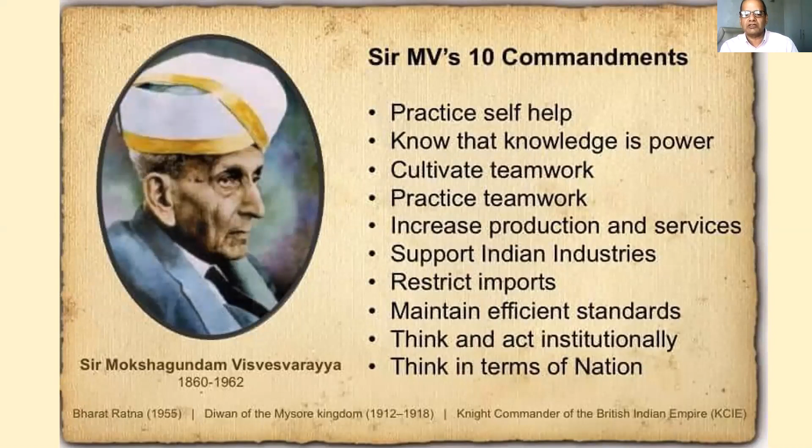So you can circulate that presentation to all the students. About the company, Skeleton Consultants Private Limited, we are three partners, two of them sitting in Indore, Mr. Arun Sodani and Mr. Jay Jain. Many of you might be knowing them. So we three are doing this. We have more than 100 years of experience now, and we do integrated project consultancy where we provide consultancy for the construction of buildings and industries.

Industrial sector is one of the major areas. Second is the building sector, where we do structural design review and structural health assessment of buildings. We do RCC buildings, steel buildings, and many new things too, which I'll show you. We also offer interior design, project management consultancy, and structural diagnostic services, which are very much needed nowadays.

Right from independence and prior to that, we have been building the nation. So it was the nation building phase. Now it is the rebuilding phase, because many of our already built structures are undergoing damage and distress, and they need replacement or retrofitting and strengthening. So we are into the rebuilding phase along with new construction. Rebuilding is a whole science that has to be developed. It is not very methodically practiced in India yet, but we need to do that, and many of you can opt for this. It's not only for civil engineers, but every other discipline is also required. This is the vision of our company, with three people, we strive on these things.

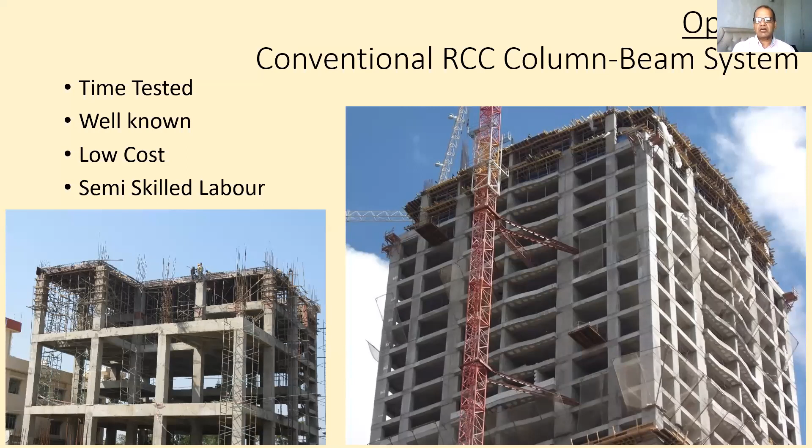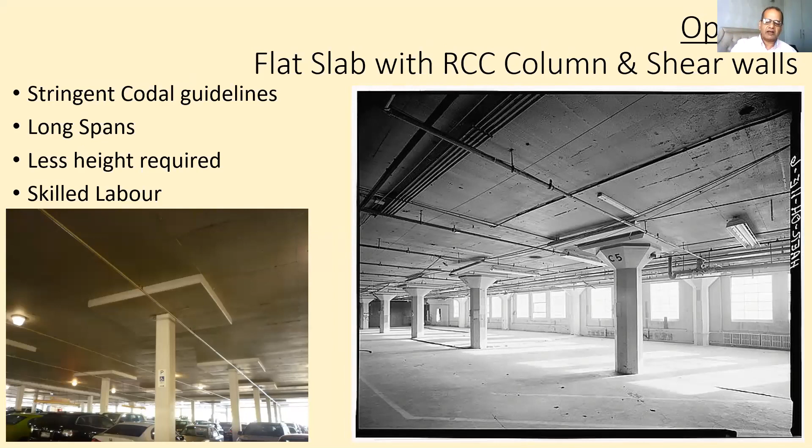Post-tensioning is the third option, where we induce or introduce initial stresses in the members, and these get neutralized when the actual service loads come onto the structure. These are called post-tensioning. Post-tensioning or pre-tensioning, both options are there, but post-tensioning is done for beams and slabs, and you can achieve better structures because in these post-tensioned structures, cracking is also controlled. Concrete has one enemy, which is cracking, because of its brittle nature. Once concrete develops fine cracks, atmospheric agents and factors affect its durability and it starts degrading with time. But in PT or post-tensioned structures, cracks are controlled and their life is certainly longer.

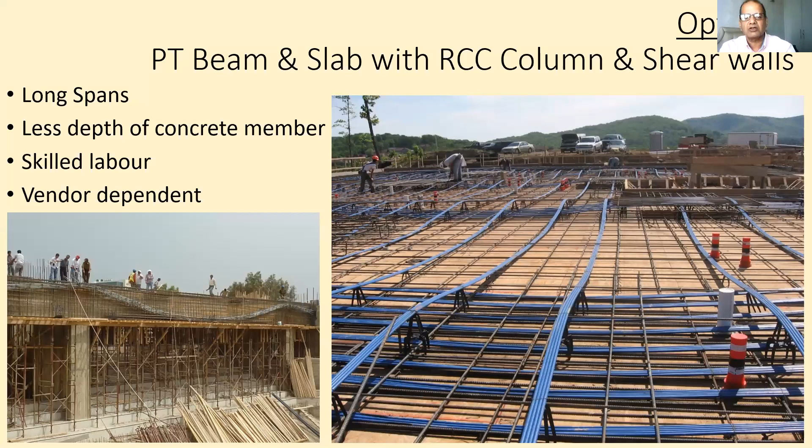But there are more new technologies, with a bit more involvement beyond semi-skilled labor—skilled labor and other things are needed. All these three options I've shown are done on site, or cast in situ, meaning they are done at the site itself.

But there is another type of construction called off-site, meaning you make everything outside, somewhere in a plant or factory, bring it to the construction site, and assemble it, like we do for other mechanical components such as equipment, cars, or pumps—parts are made somewhere and then assembled. The same can be done with construction. This is called precast construction. When done with concrete, it is called precast concrete construction, and we can do this for columns, beams, slabs, and everything.

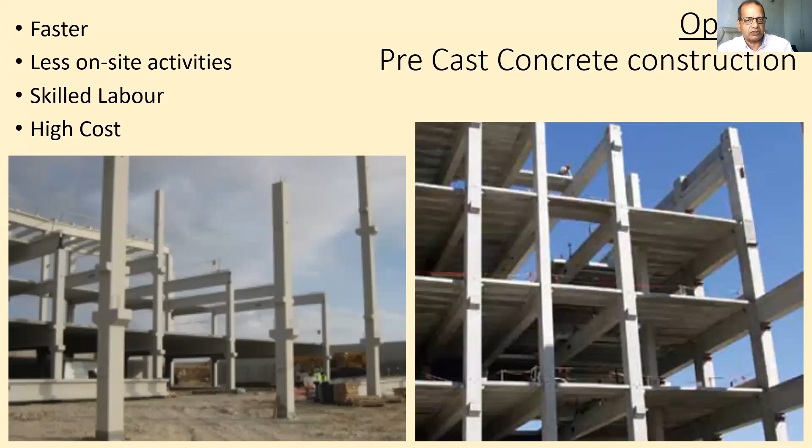This is a bit costlier, but if there are several repetitions or modular construction, these become viable and even cheaper. These are much better quality products because they are produced under the quality control of a factory environment. The site is more clear, neat and clean, with no hassle—you need not stack material or do curing on site. These are big advantages.

But steel is comparatively a costly material than concrete, though it is faster, aesthetically good looking also. You can see these very good structures, many beautiful structures around you. All of you must have seen steel structures.

Sometimes when I ask in class, if this would have been a physical lecture, I would have asked all of you, have you seen a steel structure? Many of you are unaware that there is a steel structure around you and you start looking left and right. But you all have seen very good steel structures. The railway is one of the biggest steel structure makers in this country, so all the railway platforms and other structures are in steel. You have the factory sheds, you have the buildings also nowadays.

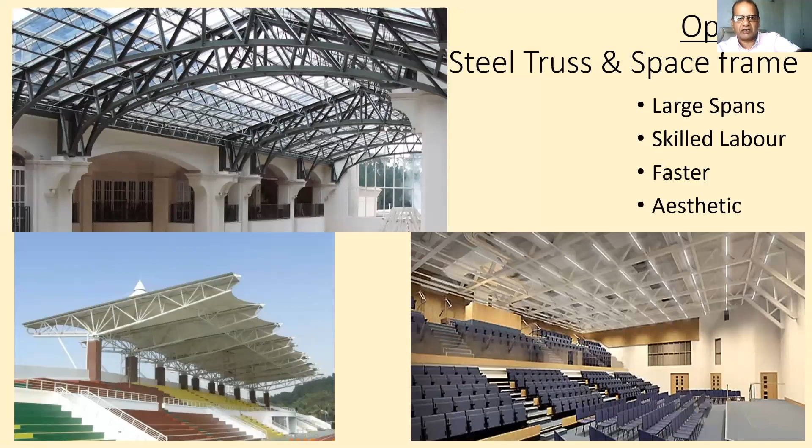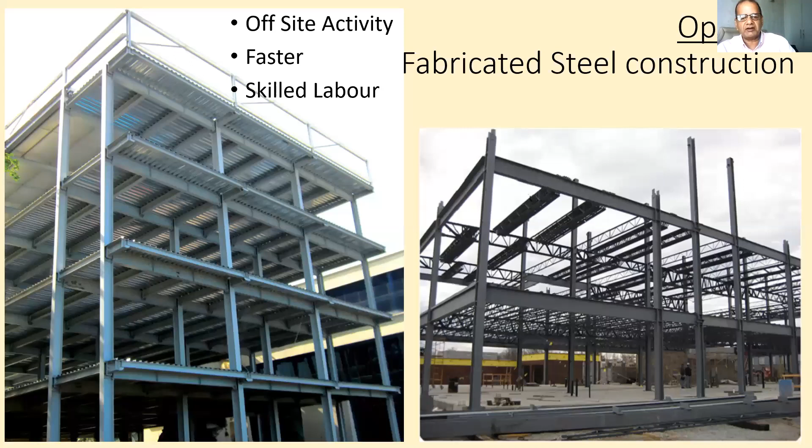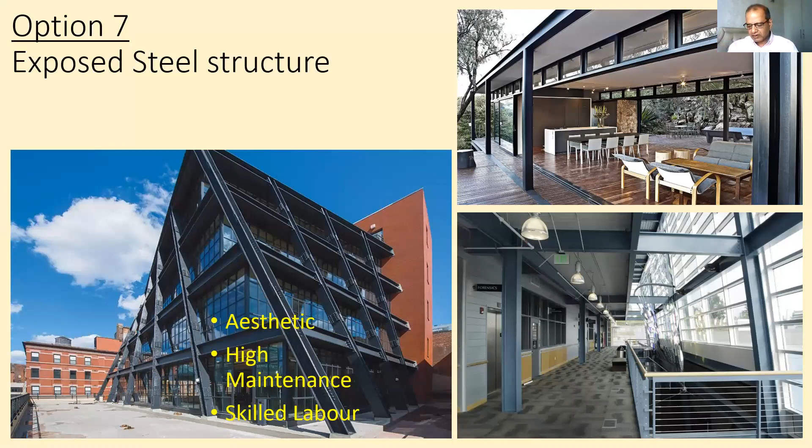Option 8 is bamboo. You will really be surprised that bamboo is being presented as a construction material. Yes, we are growing a lot of good varieties of bamboo, and there is an IS code also for using bamboo as a structural material, IS 15912, and using that several big structures have been made in the country. Recently we completed India's largest bamboo structure in Chandrapur near Nagpur in Maharashtra - it is a Bamboo Research and Training Center where a 1 lakh square foot building has been made with bamboo only.

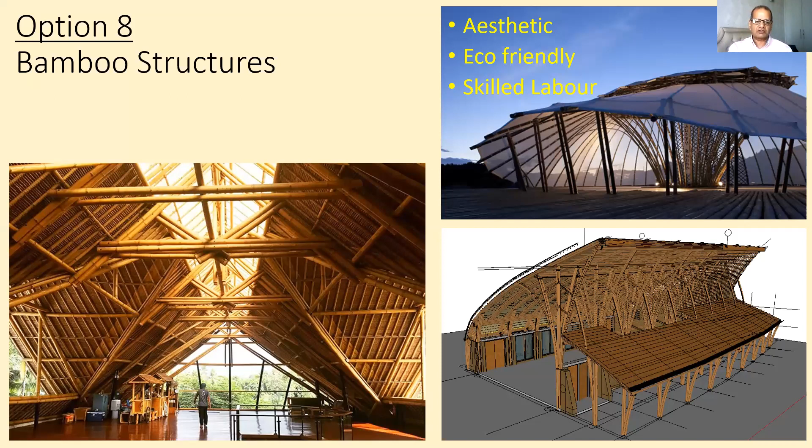There is no concrete or steel above the ground, it is all bamboo only - column, beam, structure, cover, roof, everything is bamboo. And it's beautiful. The advantage is it's sustainable and eco-friendly, but you need skilled labor because it is a new type of material, it is under the developing stage. So every joint has to be very methodically analyzed. Slowly we are developing all those joints, construction methodology, and everything for this. This is also a very good material.

These are various options using the material. Aluminum is also there, but with aluminum we are not making regular construction. Some of the projects I'll show you, which we have done, are very different projects - they are not routine buildings. They are different, just to give you people an idea of what all is available for you, for your study, for your thoughts, for your professional career and all that.

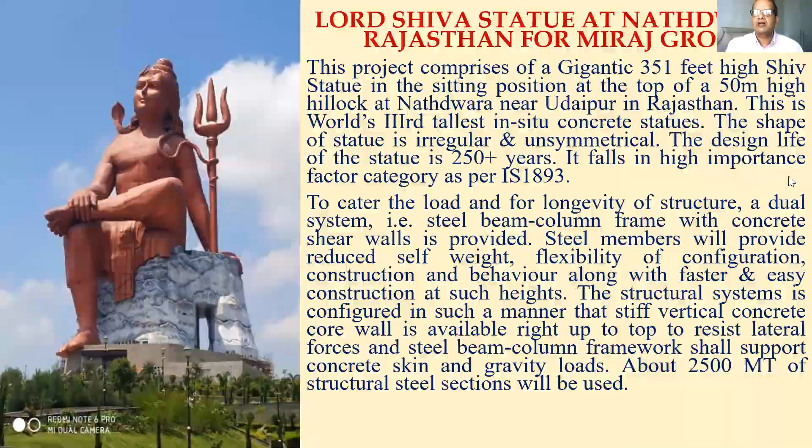This statue, I don't know, many of you must have seen - this is world's tallest Lord Shiva statue and world's fourth tallest statue. This is 351 feet tall and made in Nathdwara near Udaipur. This statue is cast in situ concrete - whatever you see, all the curves, all the shapes, everything. All these things on the head of Lord Shiva, the tilak that is made, everything, the jatayein, their hair, everything.

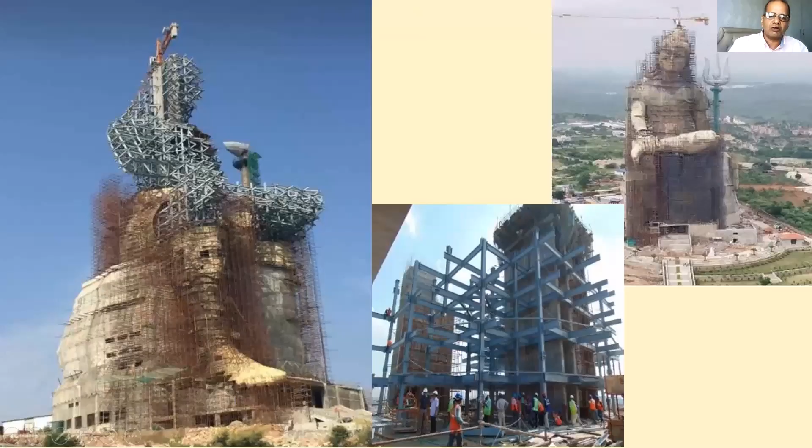This is all cast in situ concrete. Nothing has been done separately by putting some artificial material - no, this is all concrete. Even this snake hood you see is concrete, built there on cast in situ. But this all has been done on a steel frame structure. You can see on the left side image, the steel skeleton has been constructed first - the marvelous structure made with steel and concrete, 351 feet, and it is almost ready.

You all should visit Nathdwara, not from the religious point of view, but from the civil engineering and monumental construction point of view, to see this. This was designed by us.

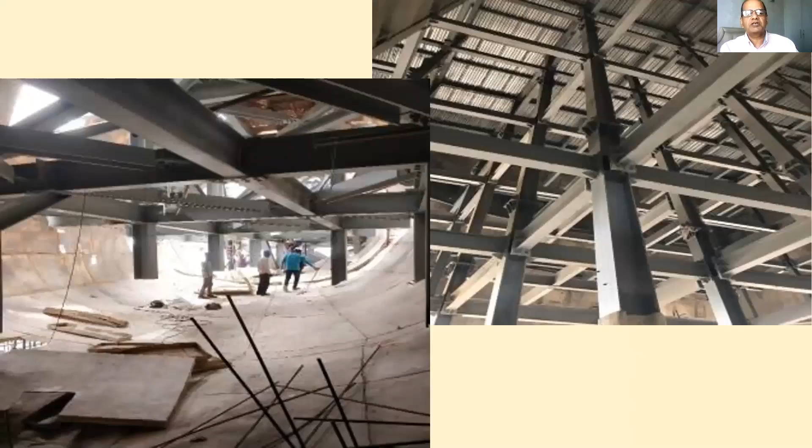The entire engineering has been done by skeleton for a life of 250 plus years. More details we can see—these are internal details of this stage. This is a residential project in Jammu, a 15-story building, a complex of 7 lakh square foot, India's largest residential complex.

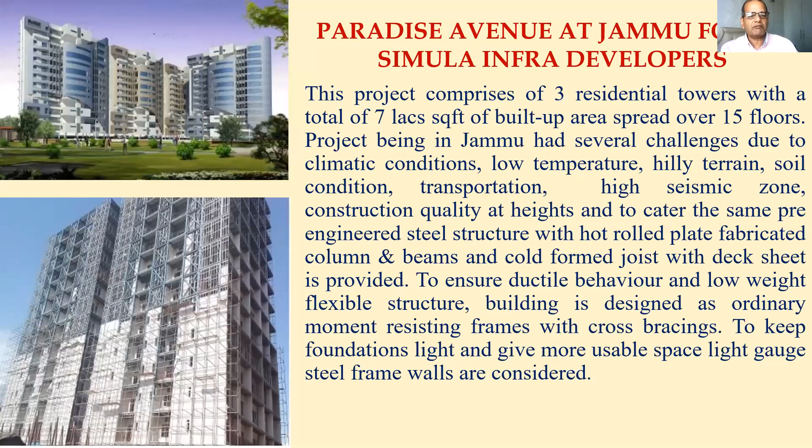It is all steel above ground. There is no concrete, brick or anything. The structural frame is steel. Walls are made of lightweight drywall. This is a finished building where the walls you see are not brick walls—these walls are boards, drywalls with insulation inside.

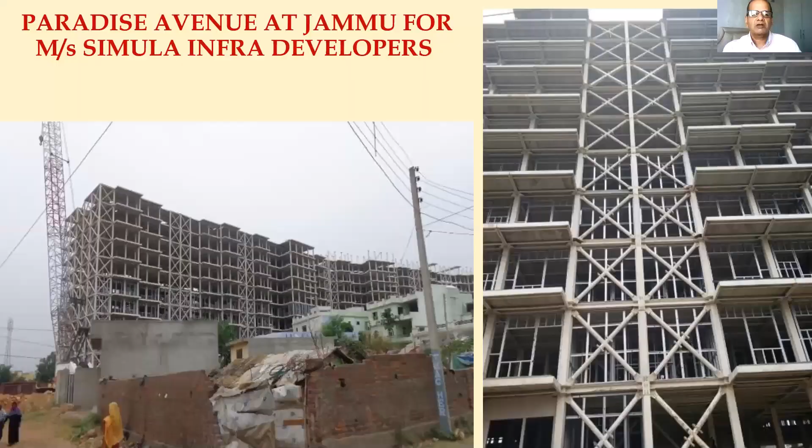For many years, we have been thinking bricks is the only available option for the wall. But later on, we understood that the purpose of wall is not to have a heavy component in the building, because dead weight of the wall is too much—brick wall is too much. So these are now being slowly replaced by the lightweight drywall and other options. These are some of the pictures of that building.

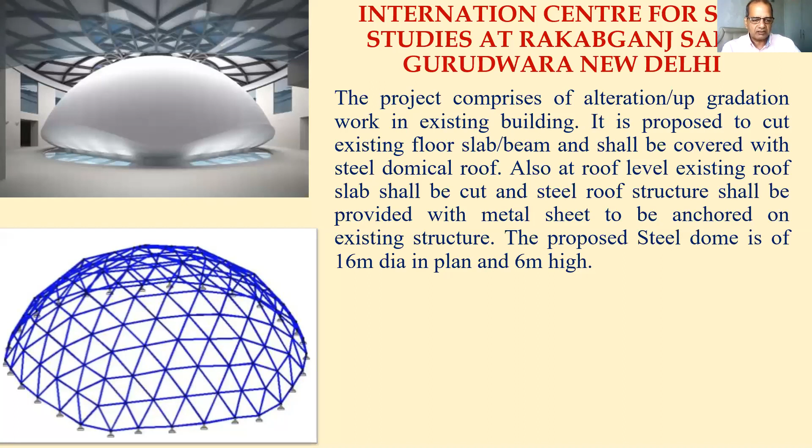This is the construction. The construction of this is complete, and we did this in a very challenging situation. It is housed inside an existing building where already an RCC slab was there on top, supported over 4 huge columns. We removed that slab, we removed those RCC columns, and we covered that with another dome—so there is a dome on the roof level and another dome inside. Both these domes are steel structure. So steel has enormous possibility of construction.

It's a mall in Dubai, again all steel. I'll not give you more details of this because in that part of the world, steel and precast construction is much more popular.

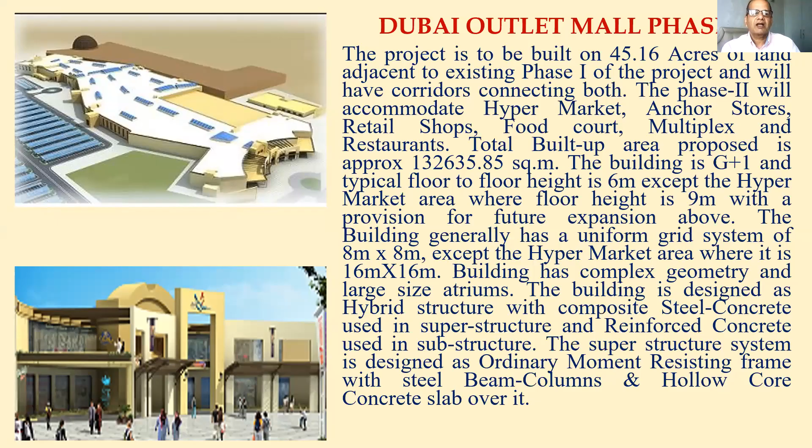These are lightweight structures used for extension in existing buildings. With increasing FAR, floor area ratios, increasing population densities, and increasing cost of land, vertical expansions have become very popular. But the existing old buildings are not designed for those many floors and those loads. So light gauge steel framed construction—very light gauge, thin—is used.

This kind of, if I see, you can see these structural frames. These are very light, 1 mm thick sections. These are called light gauge framed sections, utilized to create structural walls and roof, and then extension with lightweight material can be done—much lesser weight than conventional brick and concrete.

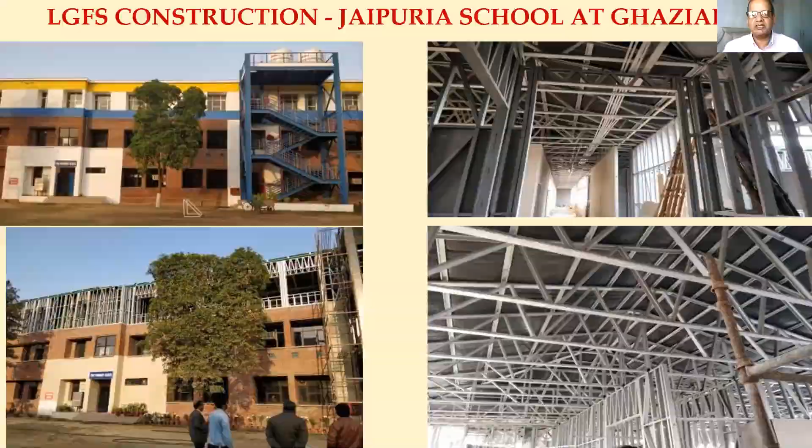This is a building in Indore. Many of you must have seen it on the bypass. This is a hotel, Golden Leaf Hotel, Golden Leaf Banquet. Once you see the finished part of this from the outside, you can't tell that it is steel. But these pictures show that it was a steel structure made first and then finished. So steel is very good for such kind of construction also.

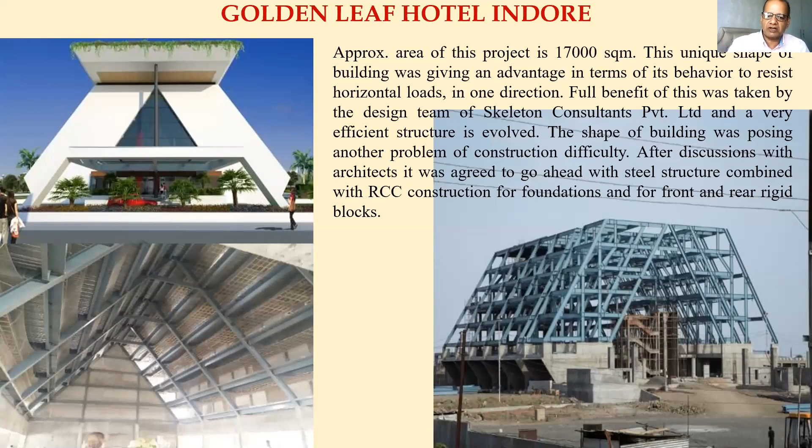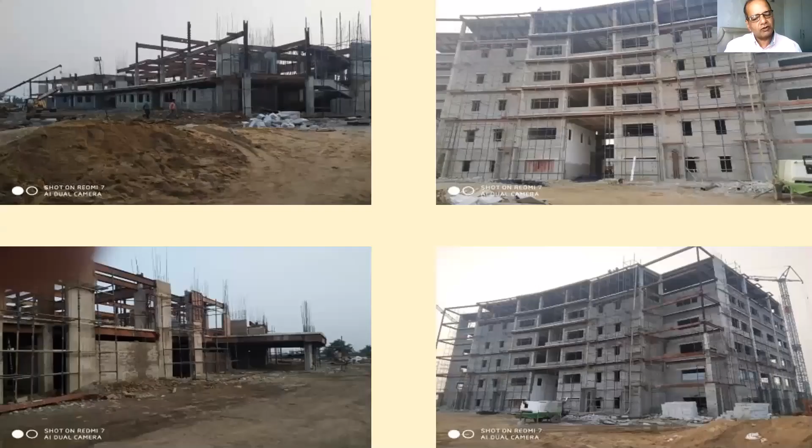By itself, steel alone has some disadvantages like fire rating, fire resistance, and corrosion. So nowadays it is being used as a composite material also, meaning the steel sections are covered with concrete, and composite behavior is achieved where the goodness of concrete and goodness of steel are combined together, and we get a very efficient structure. The IIIT Nagpur campus, under construction, has been designed by us on the composite theory. These are pictures where the steel structure is being erected and then encased into concrete.

Some schools we have done in Noida are steel buildings, completely steel structures, ground plus 5 and 6, built very fast—in about 6 to 7 months these kind of buildings are finished. This is the structure of that school.

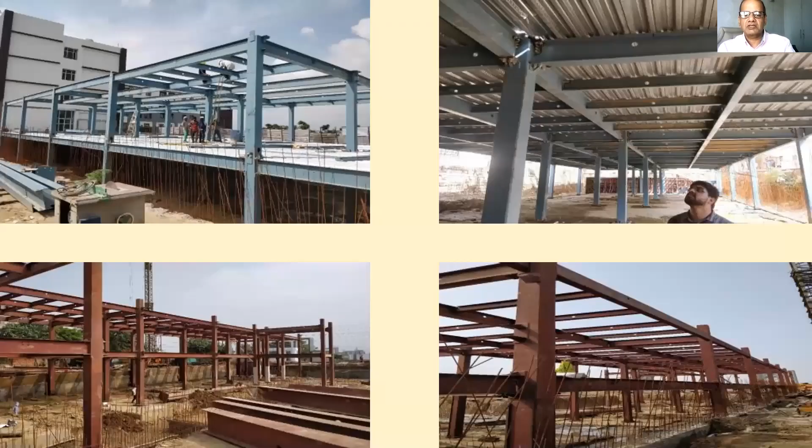For residential building, superstructure is required for the gravity and lateral load resisting frame system, horizontal diaphragm system, and wall system. There are basically three components of a superstructure in the building: one is the frame, one is the slab, one is the wall.

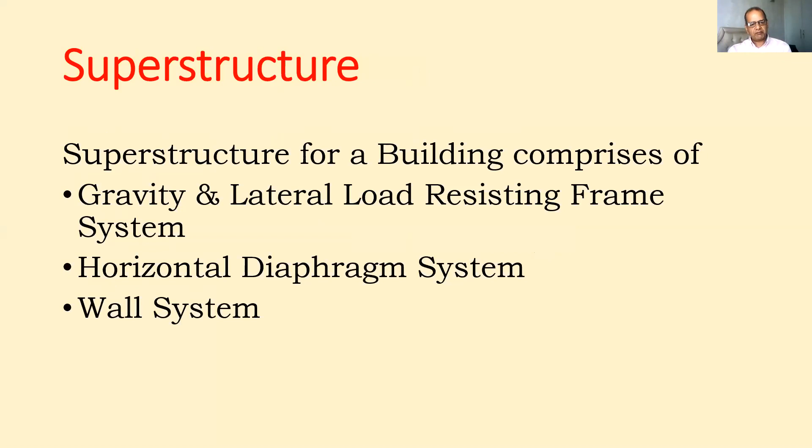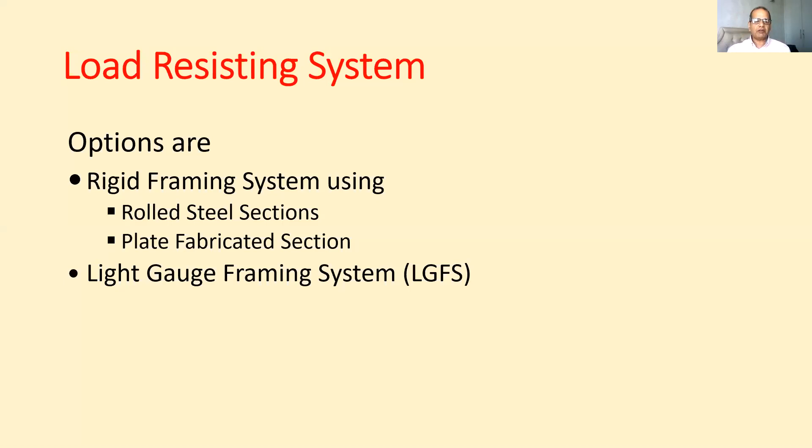There are options for the lateral load resisting system. For the frame, you can have rolled steel sections which are ready available sections, which we call I-beams or channels, and plate fabricated sections—you can make the same section using plates, which are cut and then welded to form the shape. The second option is the light gauge framing system, which I have shown. These are some of the rolled steel sections.

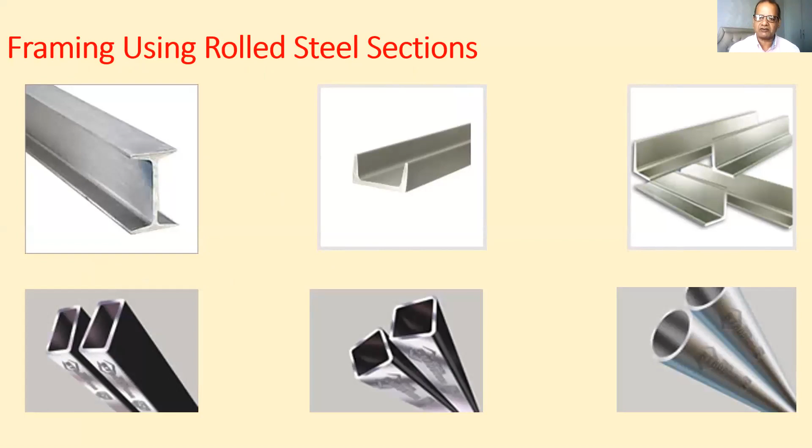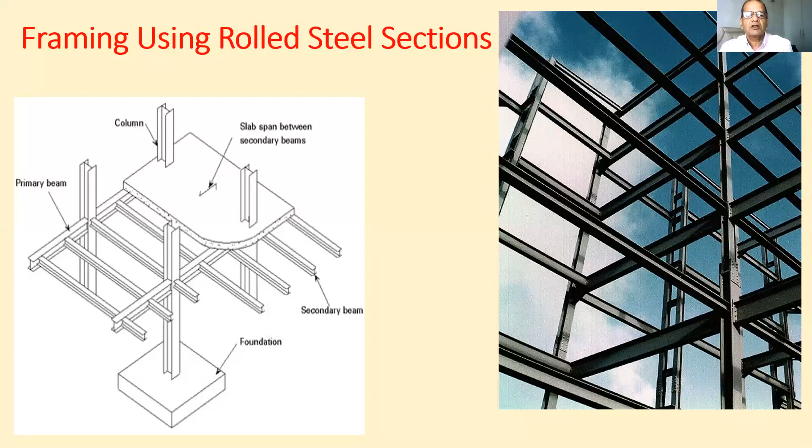Yes, sir, it's visible. These are rolled steel sections which are readily available off the shelf from the factories. We can use them, or we can make plate fabricated sections also. Using the rolled steel section, we can make building frames of this kind, where rolled steel sections are cut to size and then connected to make buildings.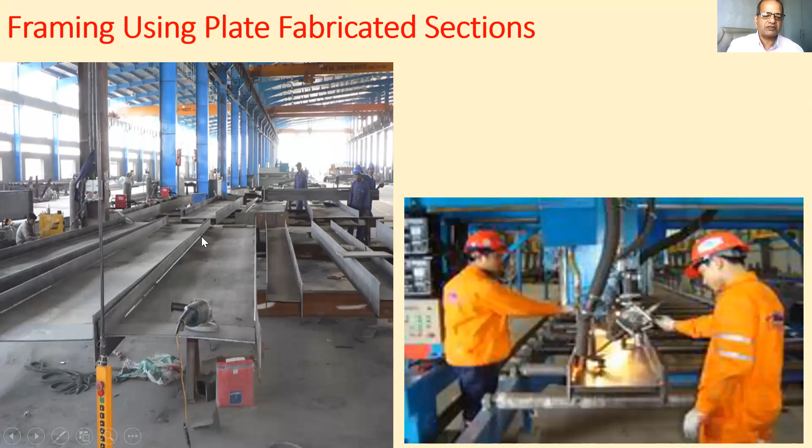Plate fabricated section means, if you see on the left side image, there are three plates - one middle plate and two plates on the sides, giving them an H or I section shape. These are I-beams or H-beams. Depending on the design, we can customize the size of these members. This is a welding machine - automated welding machines in factories where such sections can be efficiently and with good quality manufactured, fabricated, and then these kind of buildings can be made.

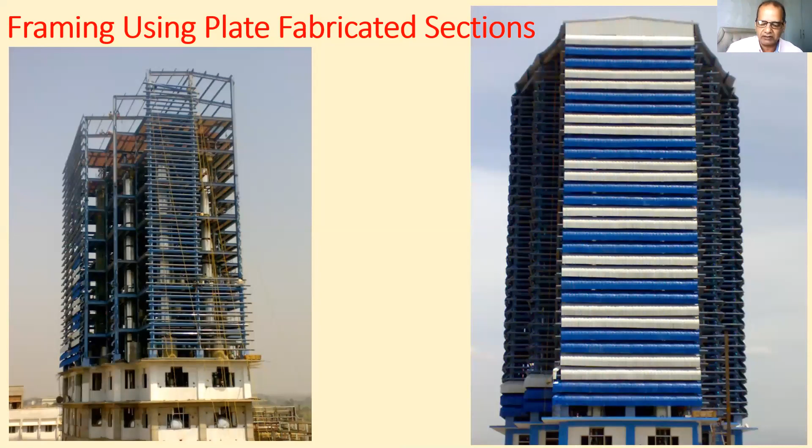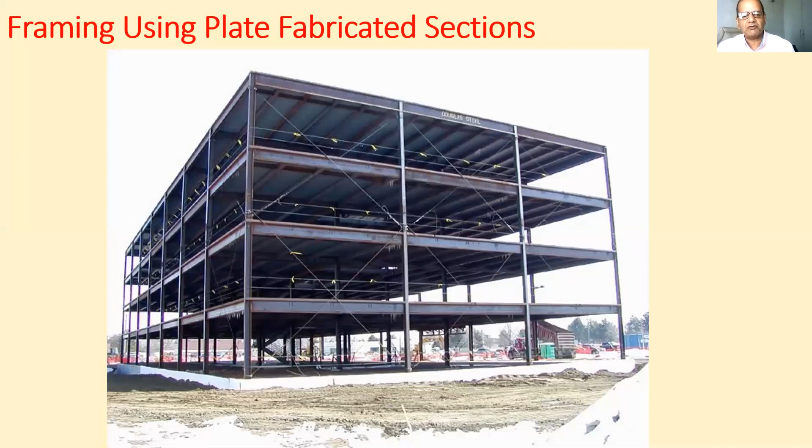This building we did in Derabassi near Chandigarh. It's an 11-floor steel building for a factory, not residential - a car parking kind of building. These are multi-level car parks made using plate fabricated sections. Long spans - you can have 35, 40 feet clear spans using these plate fabricated sections.

These are light gauge framing systems - very light, thin sections which are bent into the C channel shape from a machine. These are very intelligent machines using the CNC kind of method.

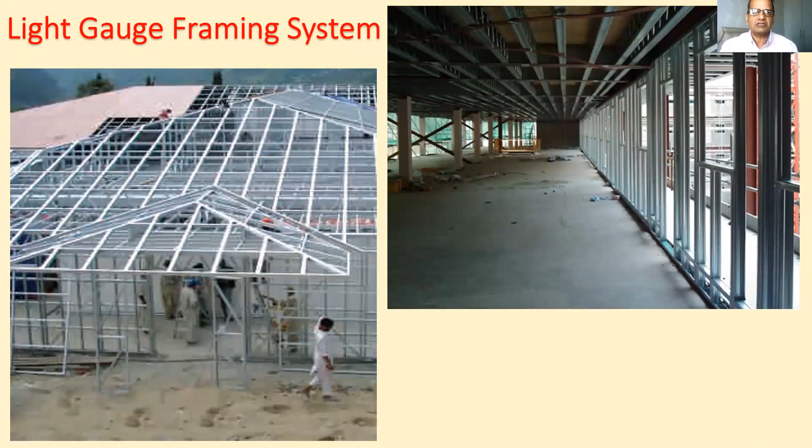The architect gives the size, the design. The structure is designed on the basis of the architectural drawing. Based on the final design, the frame machine creates individual members - that design is fed into the machine. It is a computer interface where the design is fed, and the machine itself calculates the thickness and the section sizes.

The coil is fed into these machines from one end, and from the other end, C-bent sections in the form of C channels, along with punching of holes wherever required, are produced, and then they are simply transported to the site where they need to be assembled.

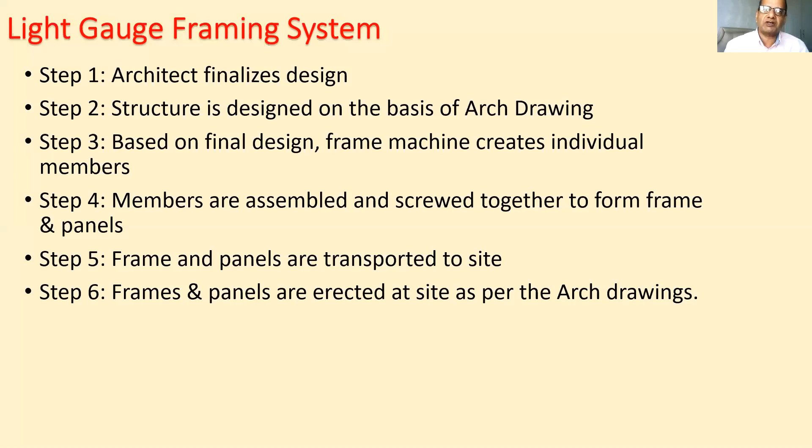With this kind of technology, small buildings like 2 or 3 floor houses can be manufactured in just 1 month. The entire production of material required for such houses is done in 7 days, then it's transported to the site where the foundation is. Because the structure weight is light, you need a light foundation, and assembly is done in about 2 to 3 weeks total. I'll show you the example of one very fast construction in subsequent slides.

Horizontal diaphragm system - for that there are various options. We can have composite steel beam and slab, meaning steel frame with a composite slab over it. Joists and metal deck with concrete screed on top. Joists with fiber board - I'll show you all these things.

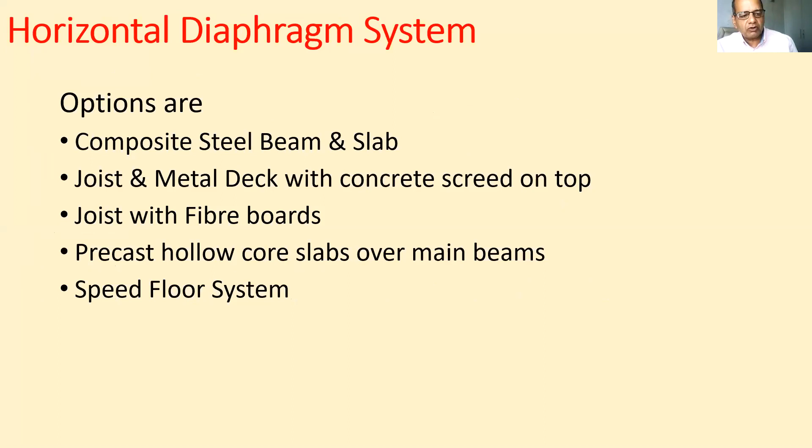Composite steel beam and slab - this is a steel beam on the left top image, over which there are studs, over which the metal deck sheet is placed, over which concreting is done, and the floor slab is ready. You need not put props from below, so the floor below is neat and clean. The work is done on that slab only.

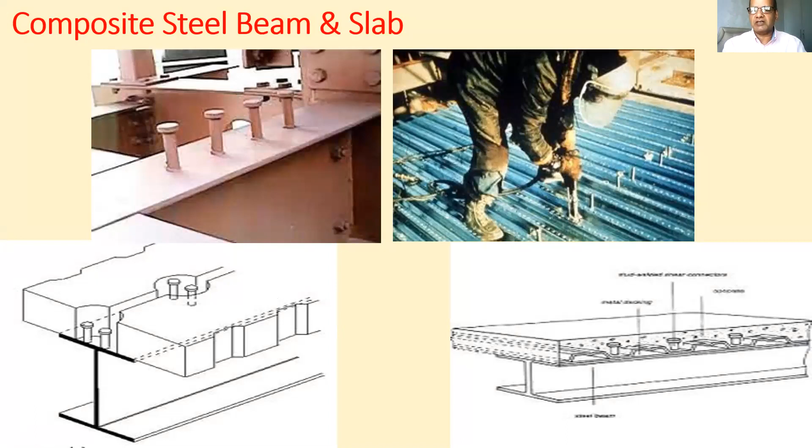These are the metal decks, metal profile, corrugated profile. You must have seen the corrugated profile, but nowadays there's a lot of advancement in it. Earlier we used to support them at every 1.5 meter with a joist secondary member. But nowadays these profile sheets are available with such profile that up to 3.5, 3.6, even 4 meters, you don't need any secondary member support. So neat and clean slabs are created without any supports in the middle.

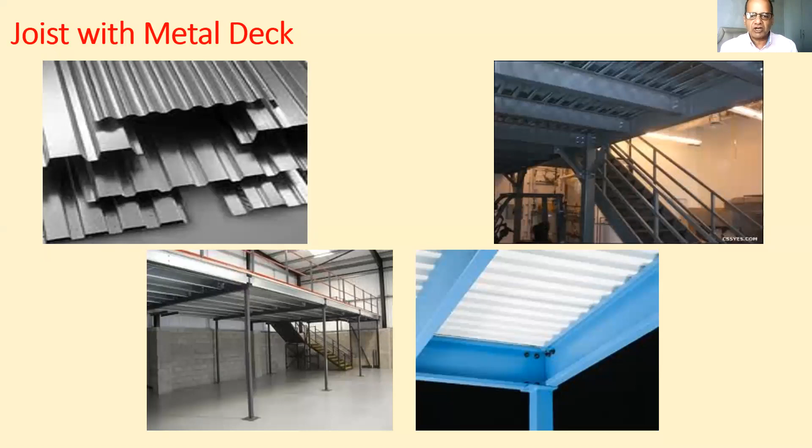Fiber boards you can use - there are very good quality fiber boards available, heavy duty, which can be directly placed over the steel beams, and over which you can directly put floor tiles, and the floor is ready for use.

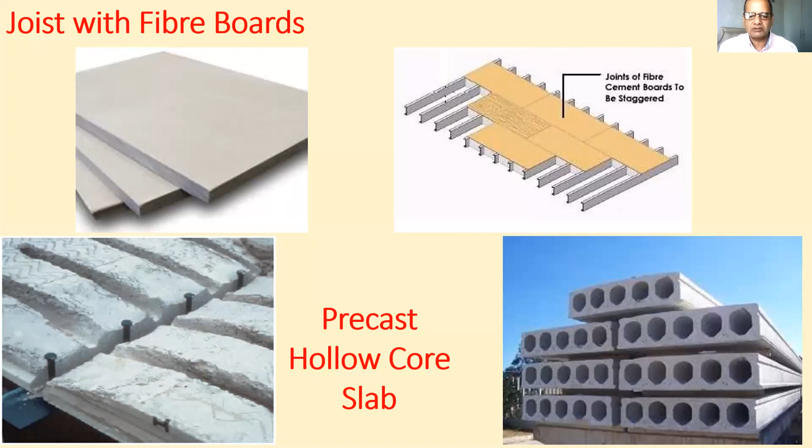Precast hollow core slabs - you can see on the right side, these kind of slabs are produced with hollow voids in them. Once the voids are there, the weight is reduced but the section modulus is increased. These precast hollow core slabs can be used straight away over 30, 40 feet span directly, and services can be passed through these voids. So these are very good advancements in technology.

This is a very good flooring system, the speed floor system. As the name suggests, this is very fast, where the joists which you see here in the right bottom image, there are joists.

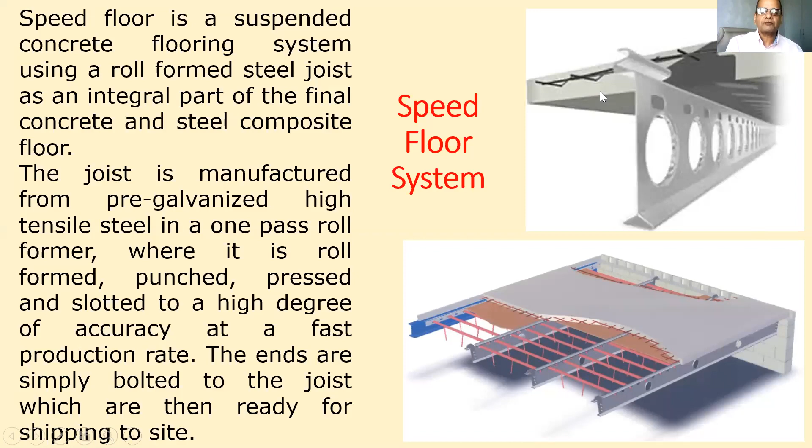These are joists, a very special type which can be supported over 4 meter, 5 meter, or even 7 meter spans. The top of the joist is embedded into the concrete which is poured like this. This is the joist being placed.

Then there is a stopper bar, followed by plywood shuttering which is placed like this. Concrete is placed, and when it hardens, the plywood is removed from the bottom, giving you this clear, aesthetic picture.

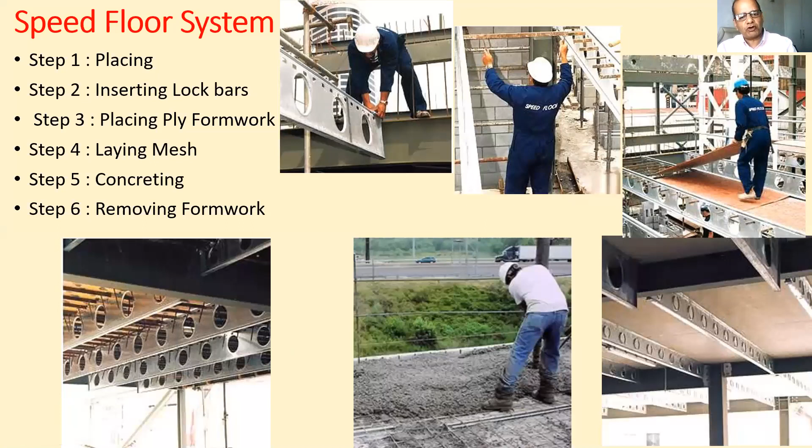So very fast, in about 3 or 4 days, the floor slab is ready. It looks like this, neat and clean. This technology has come to India.

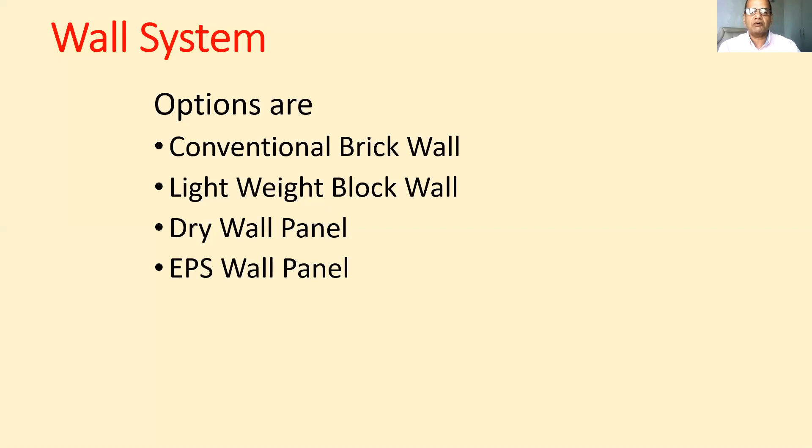Now this is a very good development on the wall side. For long we have been using brick walls. These red brick walls are very heavy. Fly ash bricks are again heavy. So these heavy brick walls are being replaced either by concrete block walls, which are solid wall blocks and will again be heavy.

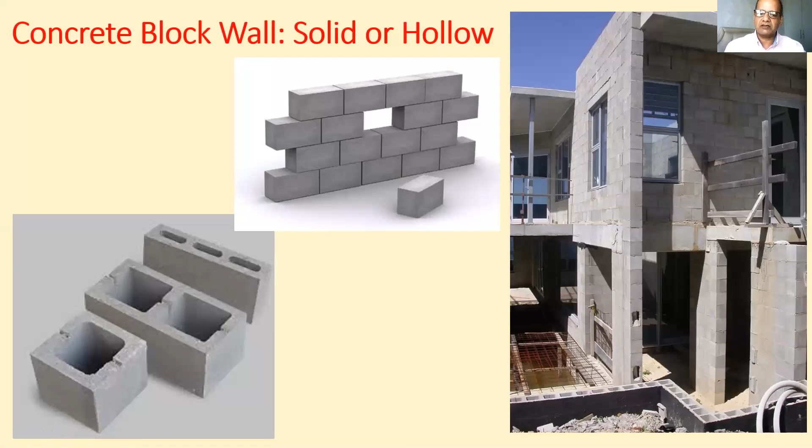In the drywall system, there is a steel member in the middle at every 2 feet spacing. On both sides there is a board, and in between there is insulation filled in. So these walls serve thermal insulation, acoustic insulation, safety, and temperature insulation — all functions are served, and they are very lightweight with very fast construction.

The only drawback these walls have is that in India we have a tendency of nailing into the wall.

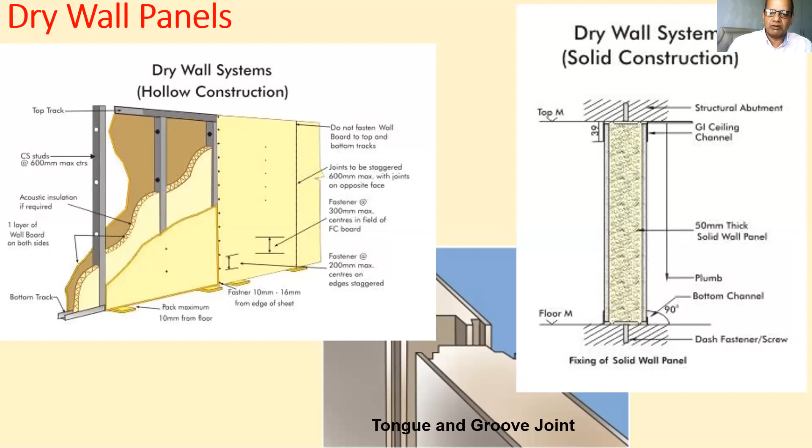In schools, we are using them widely. This is the construction sequence of dry walls — 1, 2, 3. This is a very good development on the wall side. These are called Schnell technology.

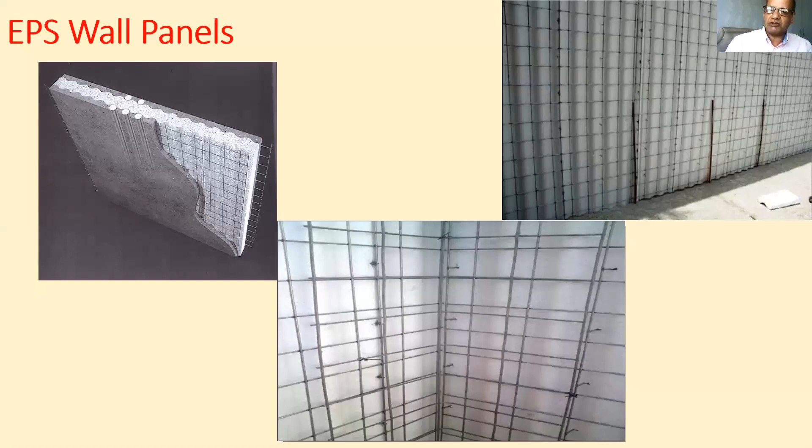This is a semi-wet process — not completely dry, not completely wet. This is how it is done, and your wall is ready.

I'll talk to you about this project very briefly, as we are running short of time — it's already 12:42. This is a very good hospital project we did between Ballabhgarh and Palwal, 55 kilometers from Delhi — the Sanjeevani Sathya Sai Hospital for Pediatric Cardiac Care.

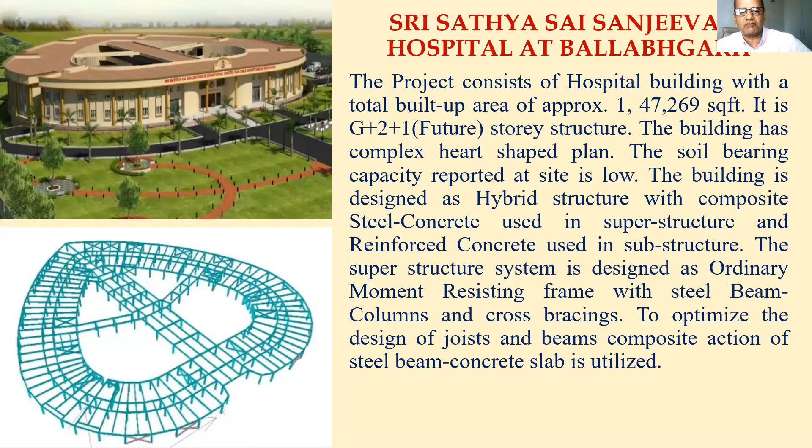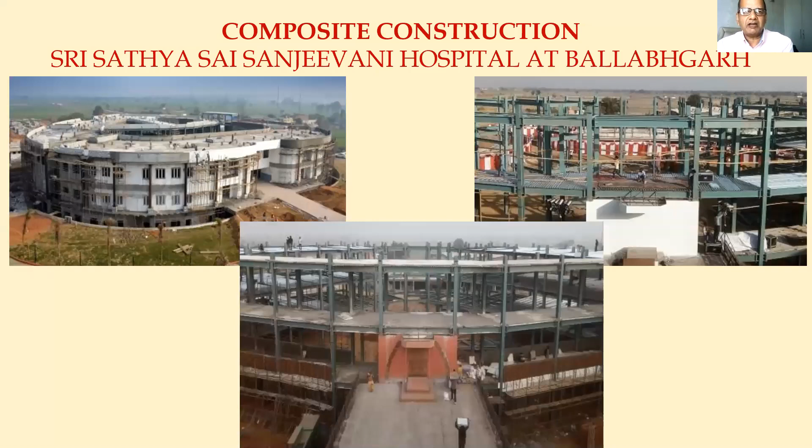This hospital is for cardiac care, so its shape is like a heart — it's a heart hospital. It's a ground plus 3 structure, 1.5 lakh square foot area, made with completely steel construction. The steel frame was there, and the floor was metal deck with concrete. All the walls are expanded polystyrene sandwich wall construction, using Schnell technology.

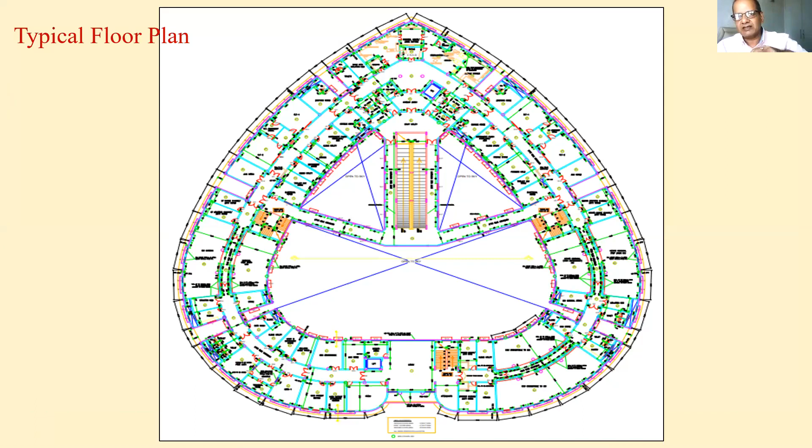With this building's typical floor plan, there were structural challenges because on one side it was wide with a large cutout in between. Mass was more on one side, narrow on the other, so it was unsymmetrical, and in the dynamic behavior there was torsion and other issues. We had to control these by providing proper bracings.

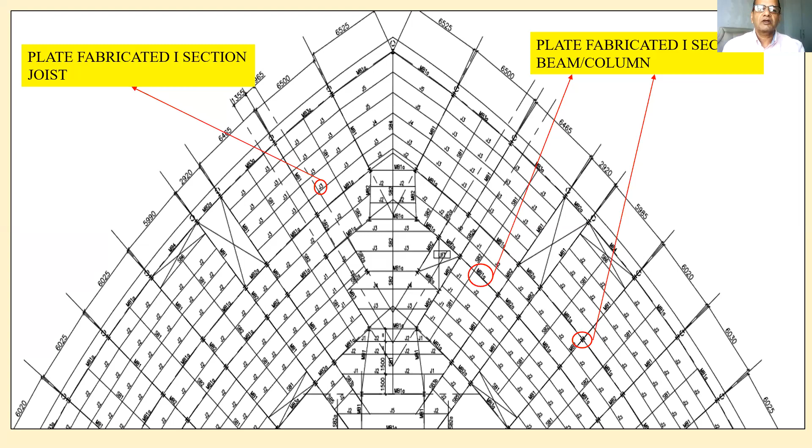You can see this is the framing plan with the steel connections for bracings, column base, and the beam-to-beam connection, both main and secondary.

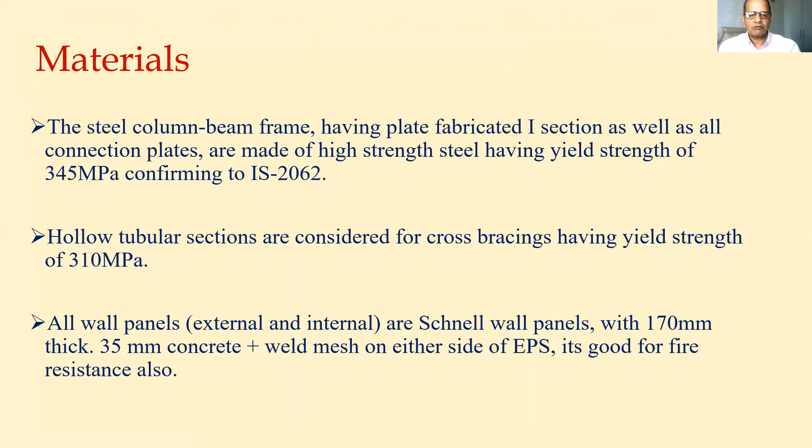I'm not going into the details of those, but for those interested, designing steel structures is a very fascinating world, and worldwide it is very popular. Learning on that side would be very good.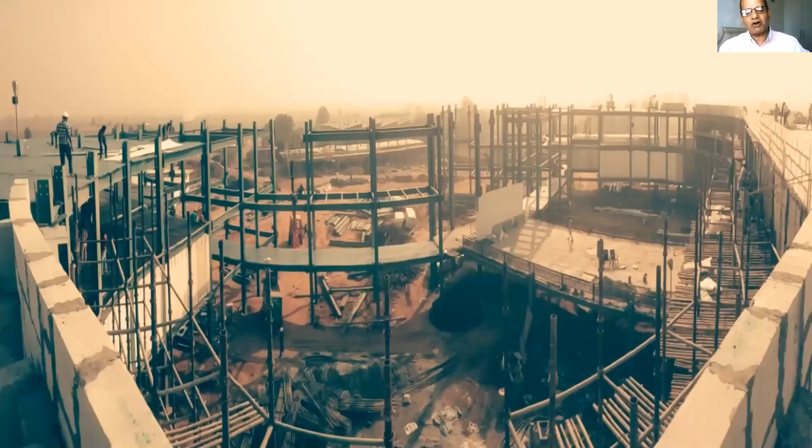The entire thing was completed and inaugurated with the first surgery performed on 19th April 2017, which means it was finished in less than 9 months using this new technology - a 1.5 lakh square foot, 3-floor building.

Since 2017 to 2020, now 3.5 years, there is absolutely no crack anywhere in the building, and it is performing very well. This is the inside finish of the hospital.

This hospital is a cashless hospital, meaning you need not pay anything. If there is any problem with any child with a heart problem, go there straight away. They will give the treatment and will not ask for a single rupee. There is just a box kept - whatever you want to put in it, you put in. There's no money needed, no receipt book, no cash counter.

So this is the advantage of the technology, where we could do complete finishing in 9 months. In 4 months, the OPD was started. In 6.5 months, other facilities were operative, and in 9 months the first heart operation was done. That was the beauty of this new technology.

So friends, learning from Dr. Sir Mokshagundam Visvesvaraya, we should all be ready and adapt to new technologies in any field. I'm not just talking about civil engineering - I know there are students from civil, mechanical, electrical, electronics, computer science, industrial engineering, and other branches. Everywhere there's new technology coming, so you must read books, read journals, and get connected.